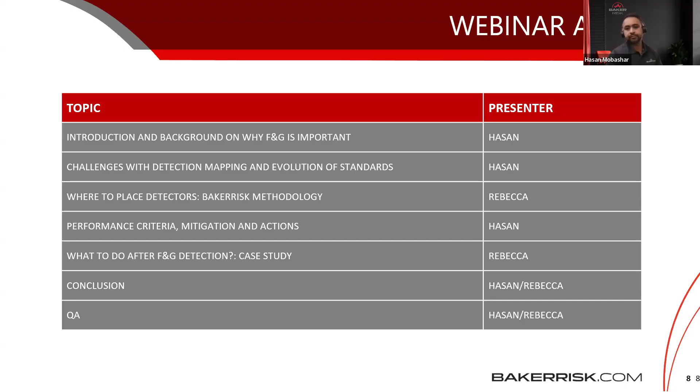So why F&G is important, and then what is F&G? So a little bit of introduction. Before we do that, just wanted to let you know our service areas in F&G, fire and gas systems.

We do provide F&G layout development and resulting coverage of detections. We provide philosophy for clients coming in with us to look into their plans, look into their equipment, and develop F&G philosophy documents for them. We obviously do consequence modeling and facility siting studies, which is the core of fire and gas sensing device placement.

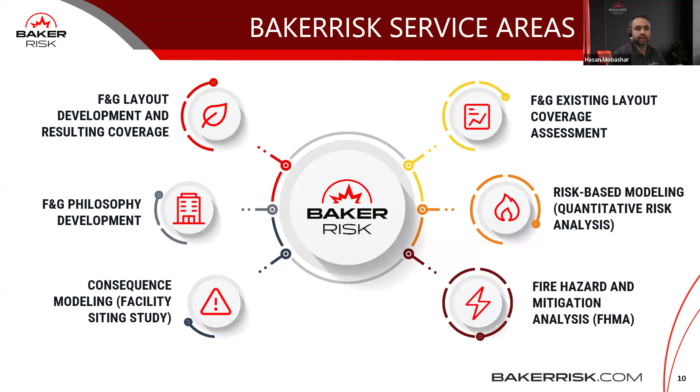We also do coverage assessment for existing layout, and then provide clients whether their layout coverage is adequate. We do risk-based modeling in terms of QRA, and then we also do fire hazard and mitigation analysis, FHMA.

So you may want to ask, what is fire and gas system, FGS? Fire and gas systems is comprised of mainly three items or three areas that you want to focus on. The first one is detections, the second one is decisions, and the third one is actions.

So detection is comprised of sensor technologies. Decisions take place in process control or a logic solver where the signal has been processed, and action is based on how you set up your fire and gas systems to act upon.

So F&G systems do not themselves reduce risk, they detect, but they need to interface with other systems to measure and mitigate risk. For example, it needs to work either with operations, so the operations can shut off a valve, open a valve, or it would work with an automated system where it would open a deluge system, or it will depressurize, or it will shut off a system to stop feed coming in.

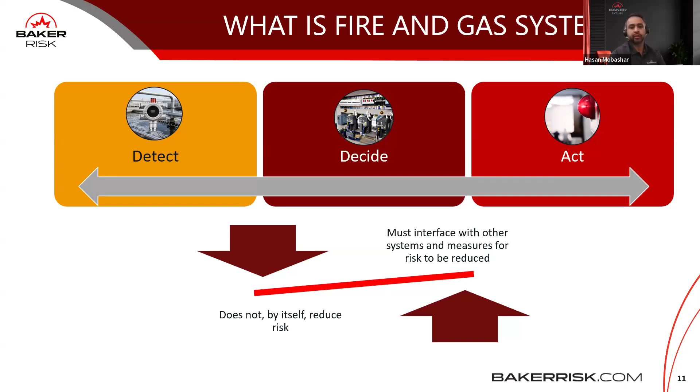So you might want to ask, if it doesn't do anything by itself, why implement F&G? The main answer is that it provides early reliable awareness for abnormal conditions. If we know the abnormal condition beforehand, we can take action and reduce the severity of escalation and consequences. F&G systems can also provide automated actions based on the programming in the logic solver, either to shut off a valve, open a deluge valve, or provide annunciation for operations to take an action.

For example, divert a flow, close a valve, open a valve, or provide emergency response guidance for employees and personnel in the plant. So in general, detection can notify of release unseen by humans, because we have limitations in hearing and seeing. Detectors can detect very small leaks and fires that we cannot see with our eyes, and provide early annunciation.

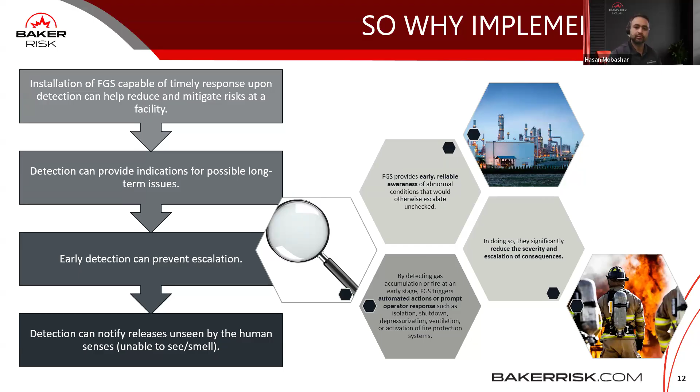In terms of response planning, detection is the first phase where we provide either point line or fire detections. Eventually it gets to the response, where we have alarm, protection in terms of emergency services, stabilization in terms of isolation, depressurization, firefighting, personnel recovery, maybe shelter in place, medical, and then eventually plant recovery, startup and operation.

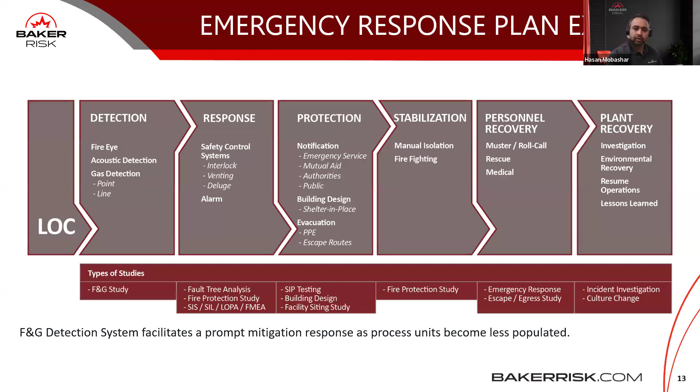In the next slide we'll show a little about what kind of software we use. Here you see our WEBTF testing facility, where we are testing a horizontal release of propane. We have this F&G tool software that we use extensively at BakerRisk, which is very powerful. We use this software to detect a toxic or flammable gas release using ISA 84 methods, and then provide a defensible layout based on the dispersion clouds or the heat released if there is a fire.

There is a link provided here for the software. After the webinar we will share the slides, so feel free to go in, take the link, and familiarize yourself with the software. This is a pretty unique software with a lot of capability.

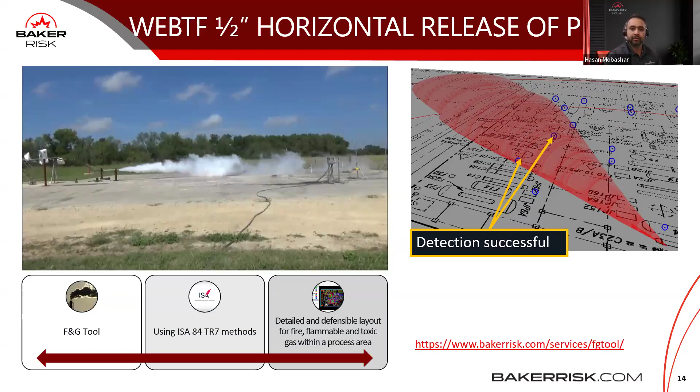So, challenges with detection mapping. We're going to talk a little about the challenges with detection mapping, and then about the standards that came out because of these challenges. When a gas is released, it varies in location, depending on the size, flow rate, dispersion and momentum, phase, and duration. It can vary greatly. Previously, people didn't know how to place detectors because they could not model the gas release properly.

So there was inconsistent and sometimes non-defensible coverage. When gas is released in an open field, that's a different pattern. But when gas is released in a plant environment with congestion, elevation changes, and ventilation patterns, it gets very unique, and it becomes difficult to predict and detect the gas.

You could say you can have a lot of detectors and increase the detector layout, but if you don't base that on proper dispersion modeling, if you don't know where the gas is actually going, increasing the detectors won't give you proper coverage. Eventually, what it gives you is higher maintenance, and it might provide nuisance alarms.

On my left side you can see various developments of standards, starting from 1815, where flame safety lamps were introduced. At one point they used canaries in coal mines for toxic presence detection. Eventually, as you go on, you can see the standards have developed from more prescriptive, experience-based approaches to more performance-based, calculation-based approaches.

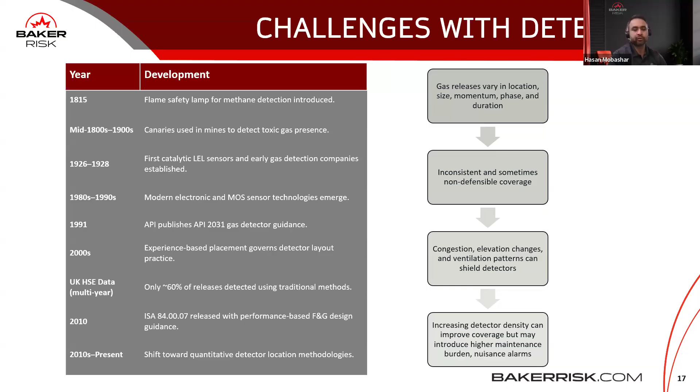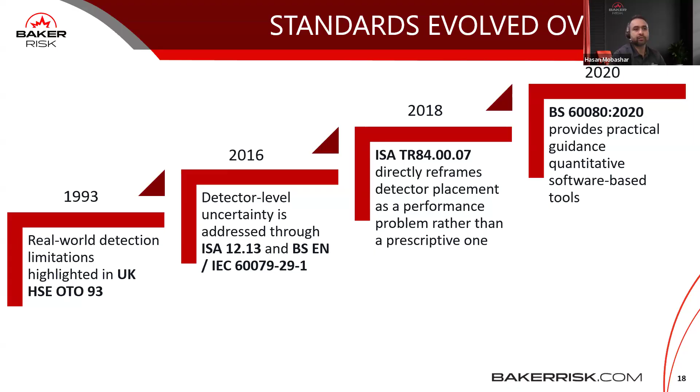So you may want to ask, what are we trying to detect? How do we detect? The request to add detection comes from various sources. It could be a PHA that they have done where they have provided recommendations to install gas detections. It could be a previous incident that happened, and then the plant may need detections. It could also be an insurance survey. Many insurance surveys want a fire protection philosophy as well as a gas detection philosophy, as well as fire and gas systems in their plants.

In terms of defining the scopes, the things we look into are area to cover. Is it a single scenario, single unit, or entire plant? Are we talking about indoor or outdoor? Are we including buildings? What are we trying to detect? Is that a flammable gas? Is that a toxic gas, or both? Are we also trying to detect fire? Are we trying to detect smoke? Or are we trying to detect lack of oxygen or presence of toxic material that people cannot breathe?

So the evaluation basis starts from how will you know that you have adequate detections, and then that is the basis for developing the F&G philosophy document or adopting standards.

On my right side, I provide a little bit of example of fire detectors, flame eyes that we see in the plant, heat detectors. Product of combustion is smoke and carbon monoxide. This is very common to see in houses or residential areas. Obviously, we know about gas detectors that you can install, which can provide detection of flammable, toxic gases, as well as provide detection about lack of O2.

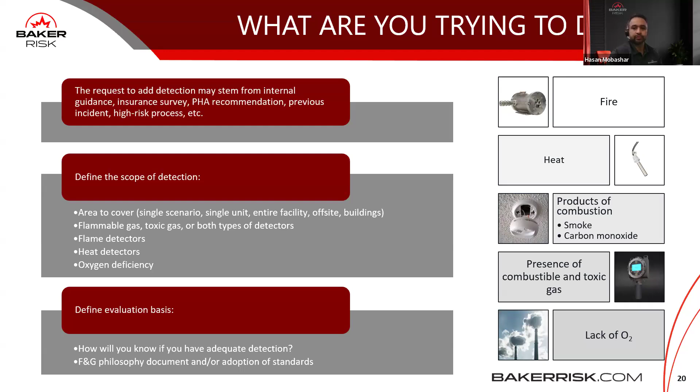Rebecca: So now we're going to talk a little bit about where to actually place these fire and gas detectors.

There are a few generic ways to calculate your coverage. One of them is the geographic base, and this is typically when you're looking at a uniform structure, it's easy to implement, and you're really just looking at what is the general area of where my hazards are at. Some key drawbacks are that it can be costly, it doesn't consider the likelihood of releases, and it can lead to some overcoverage and undercoverage, depending on if it's a high risk or low risk area.

On the other side, there's scenario based. So instead of looking at an entire area saying that there is flammables or toxics that can occur, we're looking at a scenario by scenario basis to say, here's the exact equipment that's going to have the release, etc. Some key advantages to this is it's very specific to the hazard and to the location, and it places detectors where they're most needed, and it does allow for optimization. Some drawbacks to the scenario-based methodology is that it needs consequence modeling, so it requires a little bit more upfront modeling, and then it's really focused on those high-risk releases, so lower likelihood leaks may go undetected.

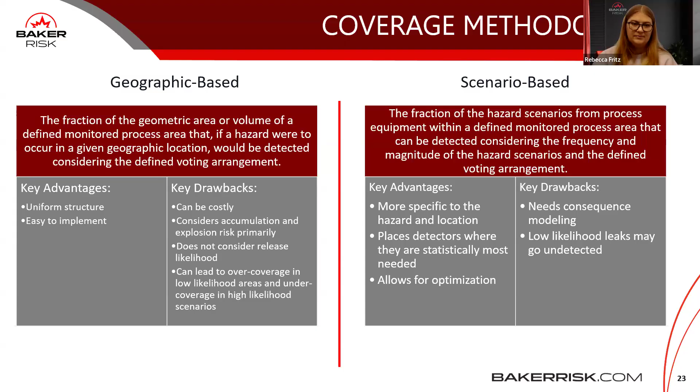So this is a very generic laydown of our methodology, but the first thing is to define the scenarios that you're trying to cover. As Hasan was saying, are we looking at just a single scenario, a single unit, or are we looking at the entire facility? Typically a facility siting study or other studies can identify those different hazards.

Then you have to go through the consequence modeling, modeling according to local weather data, process conditions, and with a special look at releases inside of enclosed structures, which can be greatly impacted by the wall configuration and ventilation system. In those cases, even more detailed consequence modeling needs to occur.

And then the final step of the methodology that we use here at BakerRisk is, what kind of coverage are we looking for? Sometimes that is set by our client's internal guidance or adoption of some kind of standard. But in lieu of both of those, we typically use the ISA TR 84 that was released in 2018, which helps define the scenario-based target coverages for each piece of equipment.

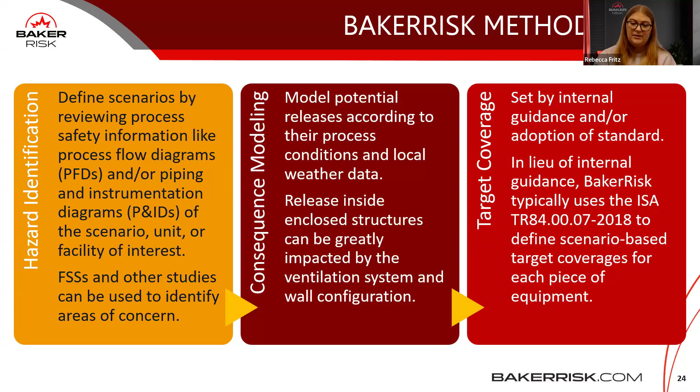So here's two different ways to look at some dispersion contours. On the left-hand side, we have a composite dispersion contour, showing the release from a piece of equipment going in all directions, developing a sphere, or a different area of where different gases could accumulate. On the right-hand side, we have an individual direction dispersion contour, showing just one release from one direction. If you can imagine rotating the right one around in a circle, you would get the composite one on the left-hand side.

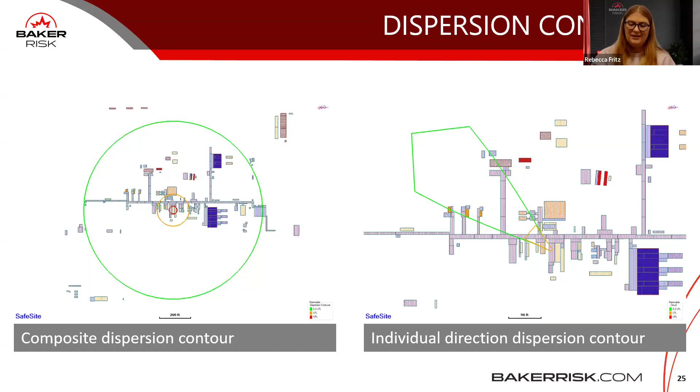So you can use these composite contours for geographic coverage, by developing that volume sphere and saying, okay, I want to detect stuff within the orange circle here on the map. It also helps you to identify where different places of gas could accumulate. But if we were looking at the scenario-based coverage, then we typically look at that individual direction contour.

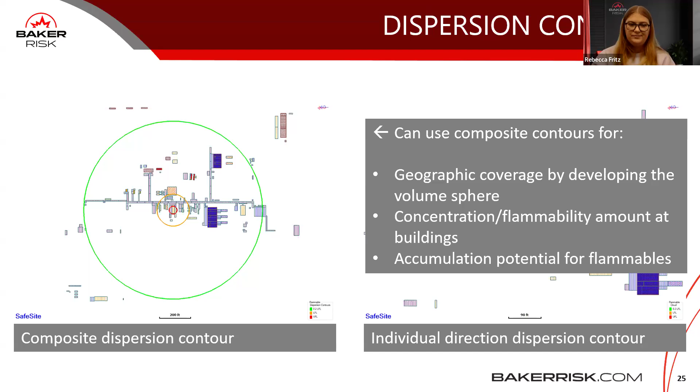Alternatively, looking at jet and pool fires, there are two different ways we look at this. There's thermal radiation, which is what kind of radiation you're getting at different distances, shown as the composite contour. And then there's the actual flame cone. When we model it here at BakerRisk, we're looking at a tilted cylinder for the fire flame modeling.

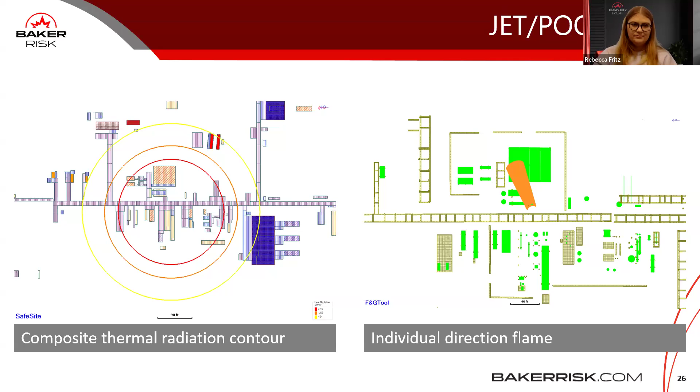You can use these composite contours to look at different things, a lot of times looking at mitigation planning, where water spray would be effective, and what kind of equipment is being impacted by this thermal radiation during a fire event.

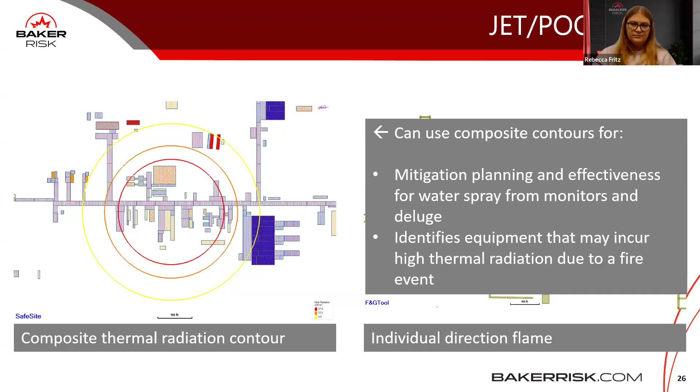Detectors are placed with many considerations: the likely release point, the momentum, where it can accumulate in a gas area, the dominant wind direction, and you want to make sure it's clear of obstructions.

Luckily, with our proprietary software Fire and Gas tool, we can model many different detector layouts one after another. We put a layout of detectors there, see what kind of results it's getting, and if it doesn't work, we try a different layout, or start paring down the number of detectors to make sure we're fully optimized. As Hasan mentioned earlier, if you place lots and lots of detectors, it usually causes nuisance alarms, a maintenance burden, etc. So making sure you have enough detectors, but not too many, is really important. That's the benefit the software can provide.

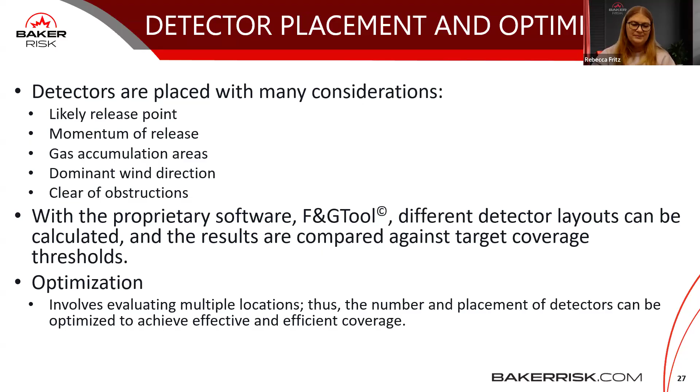Here's an IR video showing that same propane release that Hasan showed earlier. This shows that we're doing research to constantly make sure we're at the forefront of what's available. We've worked with numerous detector companies to understand detector response time, reliability, etc., and we've run two major internal research programs to answer these questions with real world data.

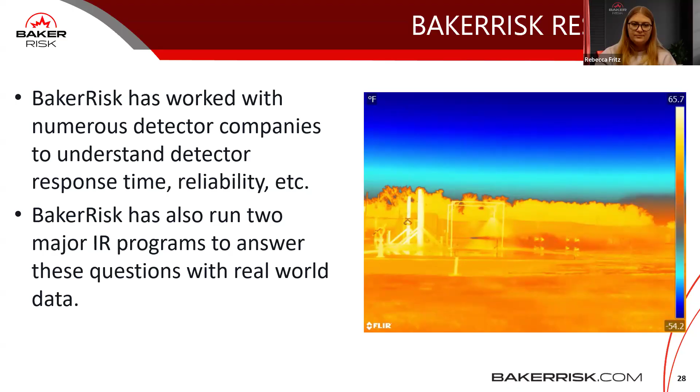So now you've seen how we test our software at our testing sites in various locations. We've also seen a bit of our software that Rebecca talked about, how we see performance based on our fire and gas tools, the shape of the flame, and the shape of the contour of the dispersion coming in. You have a basic idea.

We're going to talk a little bit about performance criteria, mitigation, and action. We talked earlier that a detector doesn't do anything by itself, right? It needs to work with something. So we're going to talk a little bit about that in the next slides.

This is called fire and gas system safety availability. This is a calculation approach we're familiar with using IEC 61511 or other reliability calculation methods to perform the actions of certain detections, logic solver, as well as final control element, for example a deluge valve. The heart of the calculation is the probability of failure on demand average, which provides the core metrics of the likelihood of the system failing when there's a fire or gas event.

We need to calculate the PFD average for sensors, logic solvers, and final control elements, and also talk about how the sensors are placed in terms of a voting regime—is it 1 out of 2, 2 out of 3, or something like that. We provide reliability calculations based on the configurations to find out the PFD average.

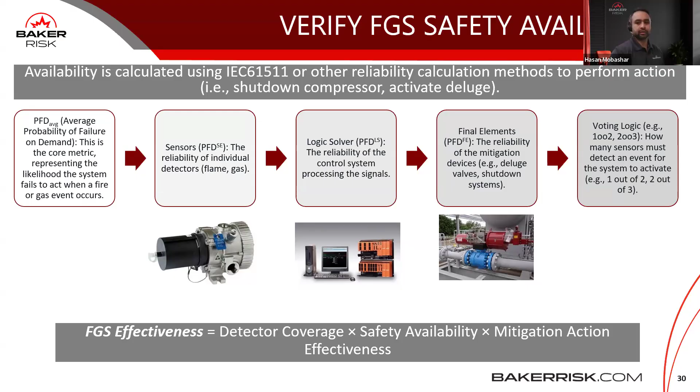So you might ask, what is the effectiveness of an FGS action? It measures how well a system reduces the severity of hazard, for example fire or gas leaks, after they occur. It's a mitigative measure and how it's interfaced either with automatic devices like shutdown valves or deluge valves, or how it interacts with operations. Mitigation action effectiveness reflects the confidence in the FGS ability to reduce hazard severity post-detection, and depends on three factors: timeliness of activation, human factors, and hazard severity.

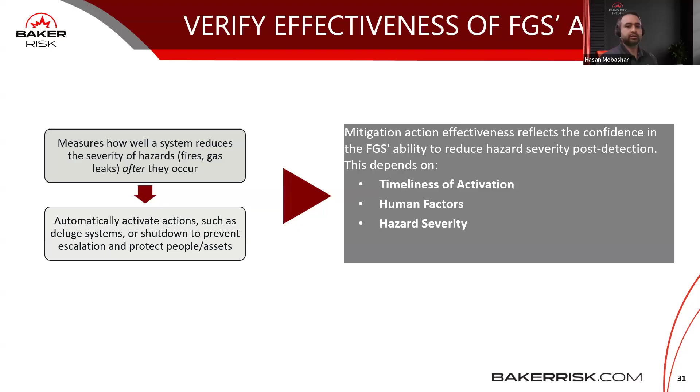So you may want to ask, once we detect, and then we talked about the emergency response plan, how it chronologically goes from detections to activations to response and mitigation. Over here in the picture on the left side, you can see some detectors for areas, and on the right side, a detector for an air intake chimney or air intake stack. Once the detection has been generated, an alarm or activate a device, so you may want to ask, what do we do? Do we just stay there, or do we go somewhere, or do we provide emergency response, or so what are the steps?

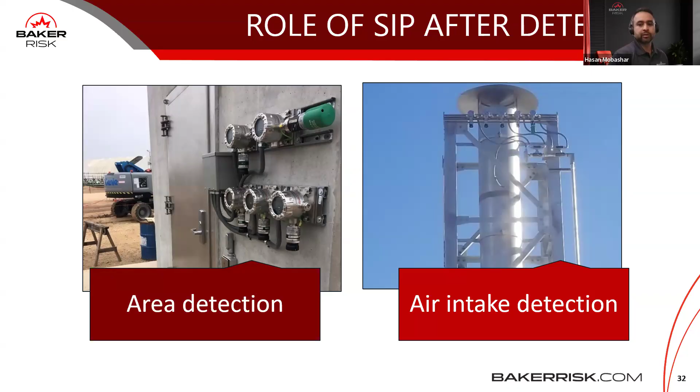So that is a key question where you might want to ask, what if we have a shelter in place? Can we go there? And then if that shelter in place is good enough to provide your protection? So this is something important that is connected heavily with the detection system as well.

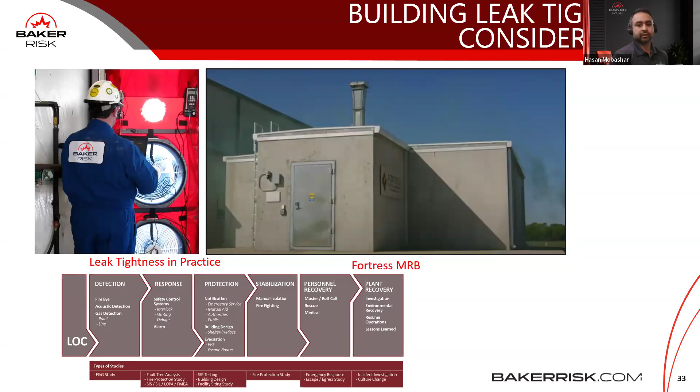So I'm going to give you an example of a shelter in place. This is called Fortress Multi-Resistance Building, or MRB. This is designed by BakerRisk. This is a multi-hazard building, and it provides protection from flammable gas, toxic gas, fire, and explosions. So once a detector detects a certain amount of gas concentration, it might provide an alarm, and then essential personnel can go inside the fortress building and take refuge in that area.

The fortress has monitoring systems which provide occupants the condition of the outside plant. It also provides critical information for units that have been depressurized, shut down, and if there is any kind of toxic and flammable gas present in that unit. Also, some of the Fortress features give you a customized graphical user interface which displays the indoor situation in terms of any kind of toxic gas presence. Some of the Fortress buildings also have self-contained breathing gas provided, and the system is designed for high reliability exceeding 99%.

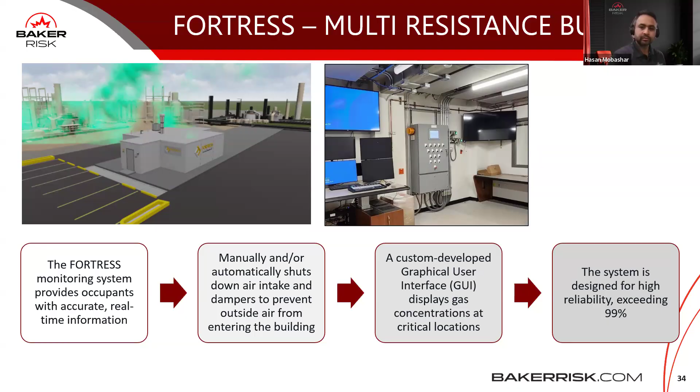So yes, now that we've talked about, that you need to develop a fire and gas philosophy document, you need to define your scope. Well, what do you do after that fire and gas detection? So this will walk through a little bit of a case study.

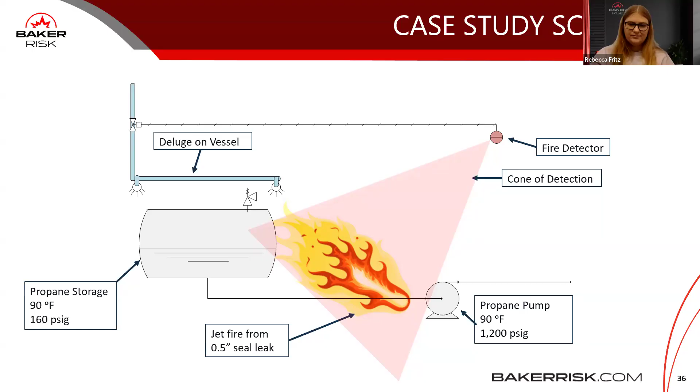So we're going to go through a few different cases. This is case one. Case one, we're saying, is going to be manual and visual only fire detection. So we're saying the fire detector's not there and there's no deluge there. So we have a half-inch fire from that propane pump. The flame is probably impinging or close to impinging on that storage vessel. There's no fire and gas detection, and so we're saying that the response is delayed by 10 minutes before that fire is visually discovered.

And then what we're going to be using as kind of a set time throughout the entirety of these three cases we're looking at is the time for emergency response to arrive and start effectively fighting that fire. We're putting it at 20 minutes. So that effective response includes getting the fire truck ready, transporting to the scene, getting the water set up, and all the fire trucks and the water spray set up. So this is case one: we have that response delayed 10 minutes plus that time for emergency response to arrive.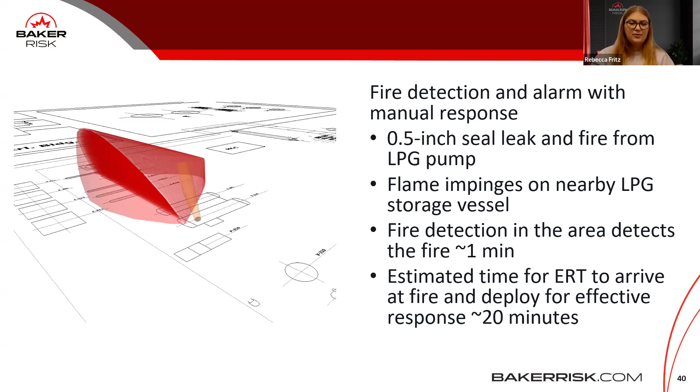All right, so case two, we're going to add in a little bit more. We're going to say that we do have that fire detector, but it's not going to be linked to anything. So as Hasan is mentioning throughout this, detection is great, but you also need to be doing something. So this is that middle state where we have detection, but it's not tied to anything automatic. So we're looking at the same fire, potentially impinging on that nearby storage vessel, but we're saying that fire detector sees it and is detecting it within 1 minute - it was 10 minutes in case one, now it's 1 minute. And again, that kind of standard time for emergency response to effectively respond to the fire.

So it's the same graphic, but now we've shortened that first little bit of time. The flammable release ignites and detects the fire, and it reports it, so the control board alarms or it just alarms outside in 1 minute. So now we have only that 1 minute plus the 20 minutes for the ERT, making a total time of 21 minutes.

Now, I'm sure based on the picture, everyone can guess what case three is. We have our fire detector, but now it's linked to an automatic deluge, so we're actually going to get water going onto that vessel very quickly. Again, we have our half-inch seal leak fire from the propane suction side of the pump, potentially impinging. The fire detector sees it within 1 minute, and then through a logic system, it tells that deluge to turn on and start getting water on the fire.

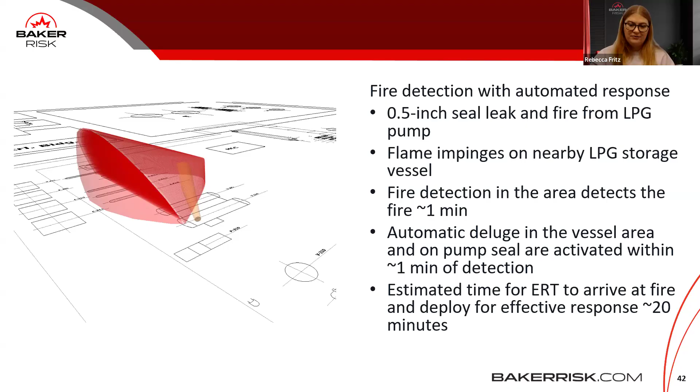So now we have two timelines working concurrently here. Again, we have that 1 minute to see the fire via the fire detector, and then the deluge is turning on in 1 minute, so for the deluge, total time is 2 minutes to start getting water on the scene. But we still have that manual piece of getting the ERT people to the scene in that 21 minutes, so we have some firefighting happening, but we still have the whole cavalry coming on that manual piece. So we have a 2-minute timeline and a 21-minute timeline.

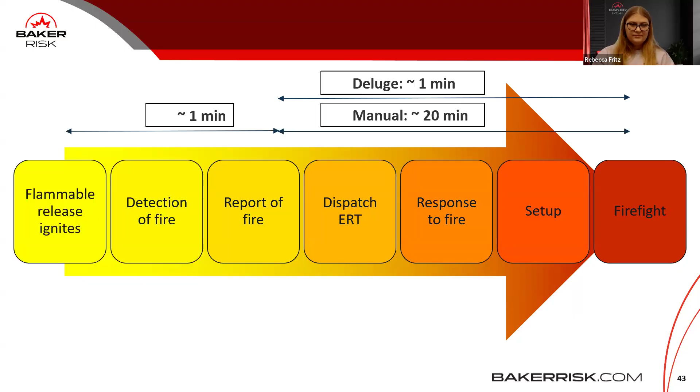Perfect. So some conclusions. Very, oh, very good, Rebecca. Thanks a lot for the case studies. This is amazing, showing how the detection works, both in terms of manual as well as automated. Yeah, perfect. Thank you so much.

So here we're just going through some high-level conclusions. The future of fire and gas detection is really evolving. It's relying less on traditional methods of saying, oh, well, this is a good place, and this is where we placed it at other places, and it's really looking more at utilizing software to help us.

We have a few figures on this side showing different fires occurring. The bottom is a dispersion cloud, but the top one is showing an enclosed fire in a building or some other sort, and how that will be much different than if we were to have that fire out in the open field or in a refinery. So using CFD, computational fluid dynamics, and 3D gas dispersion modeling is going to continue to play a crucial role in designing these detection layouts and basing it on empirical data.

Another thing we've looked at is wireless gas detection. So instead of having it run with conduit throughout your whole facility, having wireless will help enhance flexibility in the coverage. If you want to place it in one place and then maybe something else is happening or changing at your facility, it's much easier to move a wireless gas detector than to rerun conduit lines to wherever the new location is at that fixed detector system.

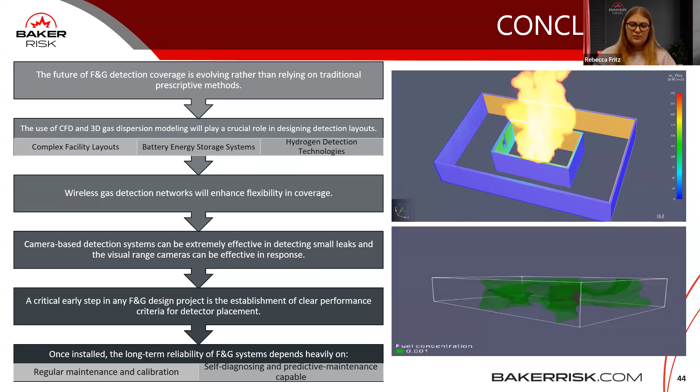The concluding comment I'd like to make is that initially F&G systems were very much prescriptive based. With the development of new software tools and standards, for example ISA 84, it's becoming more performance based. In many cases where the geometry is complex, for example indoor, there are options for using CFD capabilities. Some examples Rebecca mentioned you can see here, one is fire, another is gas dispersion. Obviously the heart of an FGS system is the philosophy. If the philosophy is defined properly and is defensible based on scientific method, that gives you a lot of coverage. Once we install the detectors, logic solvers, and valves, we need to function test them periodically to keep the system dependable, making sure that when the systems are demanded, they are working properly.

Thanks so much, Rebecca. I believe this is the last slide that we have, Naomi, so I think we're going to go to the Q&A next.

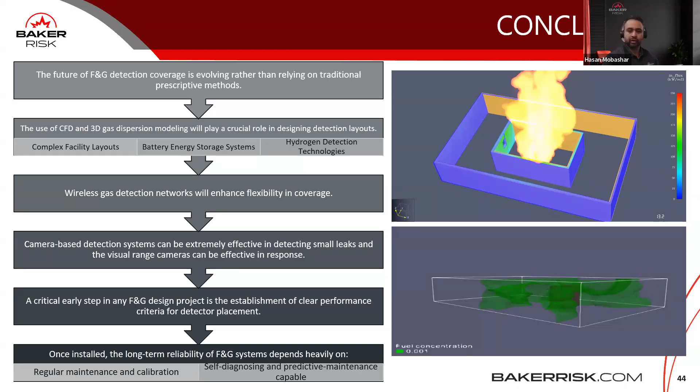Thank you to our audience, you all have been very engaging, keep those questions coming in. I'm going to bring up some of the questions that came up during the presentation. First question: where do you see organizations over-investing or under-investing in F&G systems, and how should leaders think about F&G from a risk value perspective rather than a compliance exercise?

Do you want me to take that one, Hasan, or do you have some thoughts? Go ahead. I would say getting that fire and gas philosophy really vetted and making sure everyone has bought in on that fire and gas philosophy document will really help longer term in the actual implementation stages. Making sure you have operations support at that point before you spend a bunch of money buying detectors and placing them out there, making sure you have a methodology set to say where are we going to put it, what are we trying to accomplish. Because just putting detectors out there without thinking through the why or the how really is going to drive up that cost versus thinking about adding that little bit of time to think about it and make a plan early in the project process.

Yeah, that's perfect. So FGS systems help really well when there is a philosophy, there is science and engineering behind it. If there is none, then no matter how many detectors we install, it's not going to help you, it's not going to provide coverage. It's eventually going to cause nuisance alarms and become a maintenance nightmare. So definitely don't overinvest or underinvest, invest based on a performance target, based on proper science and engineering.